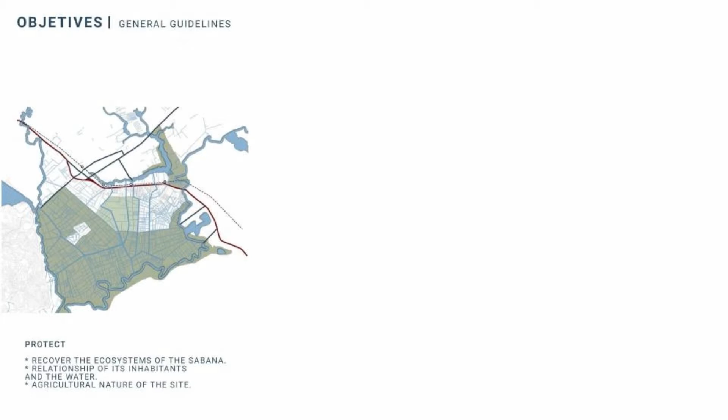With all this in mind, we generated a global plan consisting of 3 main objectives. First, to protect and recover the ecosystems of the savanna, redefining the relationships of the inhabitants with the water and keeping the agricultural nature of the site. Second, to overcome the lack of connectivity in the municipality, providing a network of corridors and connections within the savanna and the rest of the city to enhance mobility.

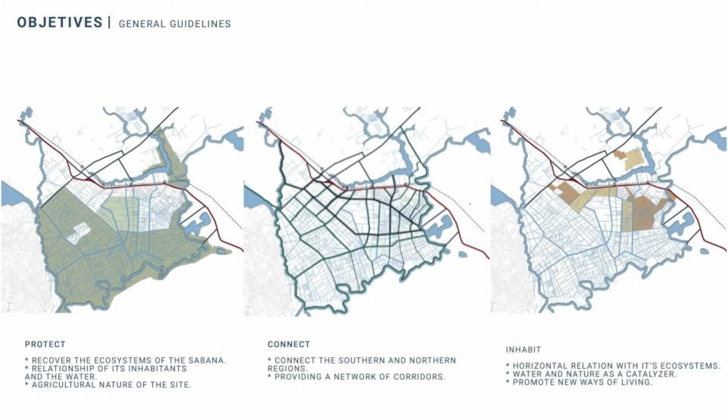And finally, to inhabit the savanna in a more horizontal relation with its ecosystems, using water and public space as a catalyzer to dilute segregation and promote new ways of living. In order to achieve these objectives, the already existing features of the site became pivotal in the development of the territorial strategy. Following the main canals, the plan proposes a network of transversal and parallel corridors to help guide development and enhance connectivity.

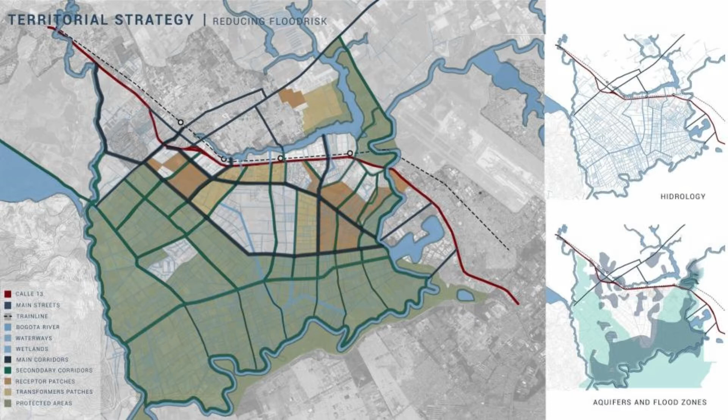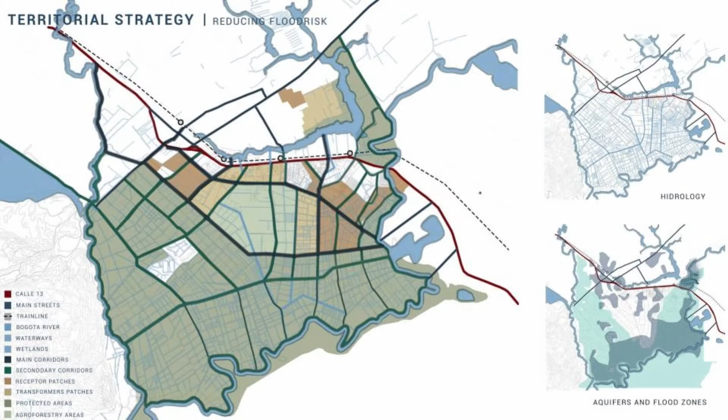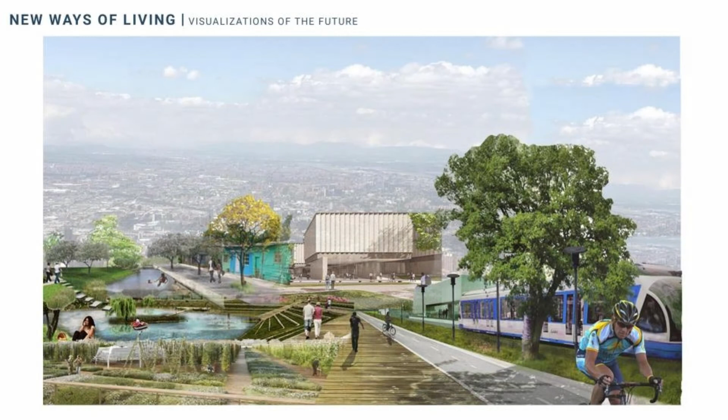With large protected areas that seek to keep urbanization off the floodplains, development is oriented towards the Calle 13 and the parallel corridors. An agroforestry area in the middle aims to articulate the eastern and western developments, while providing room for institutional presence in the area. Having defined a territorial strategy, the visualization through collage helped define the spatial quality of the project. Naturally, the integration of water into public space was a prominent feature of these explorations.

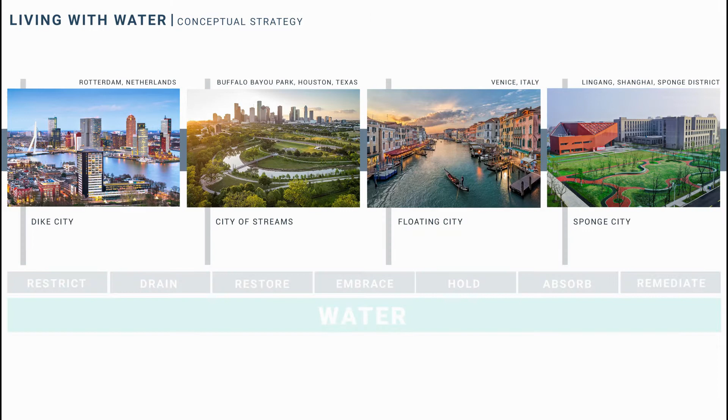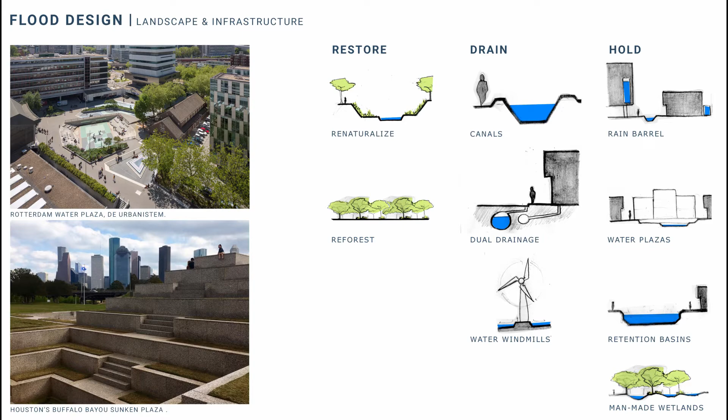Visiting the experience from cities such as Lingang, Rotterdam, and Houston, we were able to conceptualize a comprehensive strategy surrounding water. A holistic approximation to water became fundamental to achieve a more harmonic and resilient way of living in the savanna. Aiming for the spatial qualities of water, each of these strategies breaks down in landscape and architectural techniques. Going beyond traditional notions of infrastructure, this vision aims to create experiences surrounding water, enhancing resilience, sustainability, and recovering the ecosystems of the savanna.

These are reduced to three operations in the urban morphology of the site: to restrict with terraces, to embrace with platforms, and to hold with basins. The combination of these interventions allows for the conceptualization of a new, more resilient urban landscape that is complemented by a robust water infrastructure.

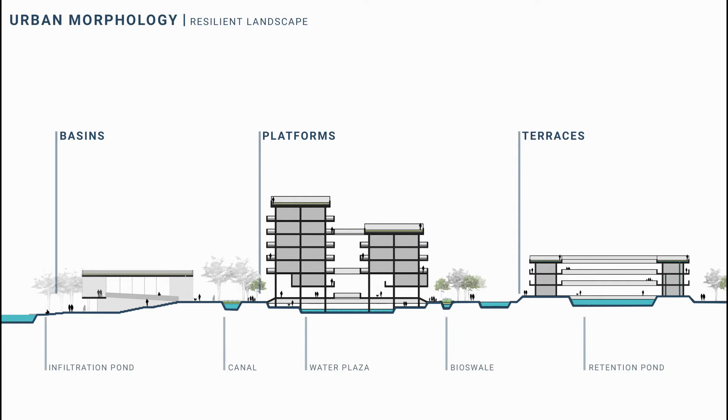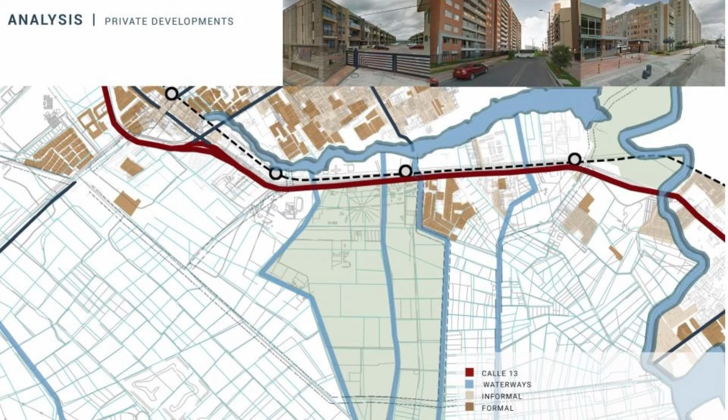Before any intervention, taking a closer look at the morphology of the site was necessary. The self-constructed patches are characterized by their high density and lack of public space. The private developments are usually isolated, with density ranging from high-rise multifamily buildings to country villas.

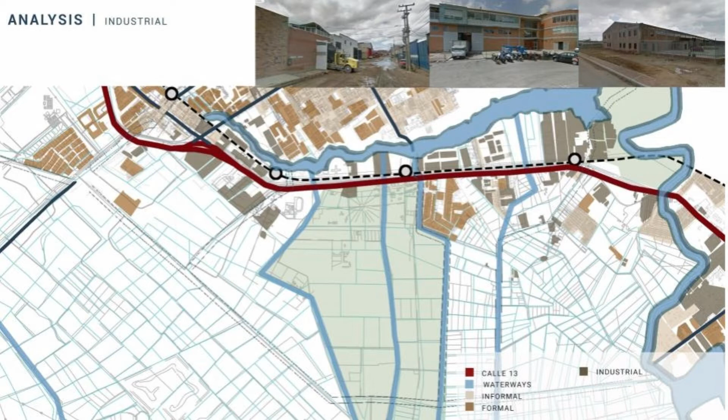The industrial activity concentrates towards the Calle 13 and the Bogotá River, with agricultural facilities also spotted in the heart of La Sabana. These activities are usually linked to junkyards, which are prone to spontaneous development. The lack of urban facilities and institutions is also evident, with very few schools and universities scattered in the territory.

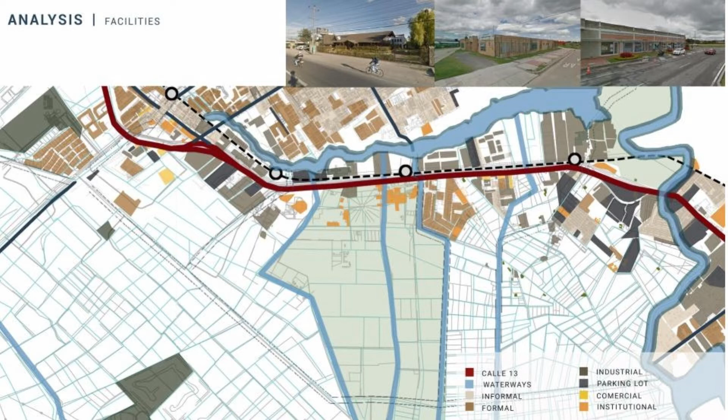Incorporating structure into the territory, the main corridors connect pre-existing features, enhancing the canals and defining the foundations of the mobility system. The different natures of the corridors answer to the conditions of the site and their role within the plan. These corridors incorporate different landscaping milestones and pieces of infrastructure, bringing people closer to the water.

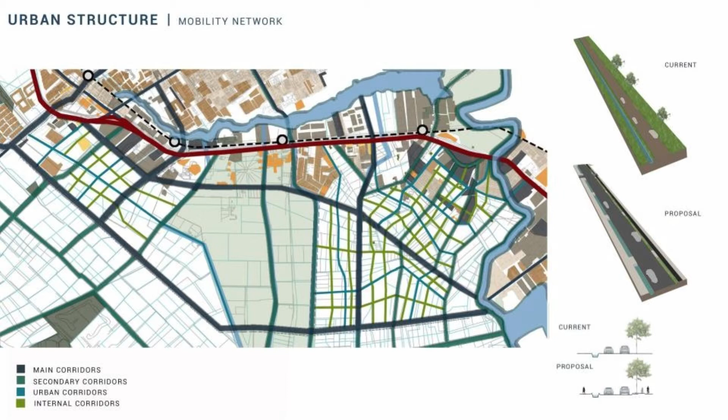The corridors also scale down the territory into urban islands, creating a more flexible urban fabric. A complementary network is proposed within the islands. The mobility system articulates a network of urban spaces and guides development. This public space network is an integral part of the water management system of La Sabana.

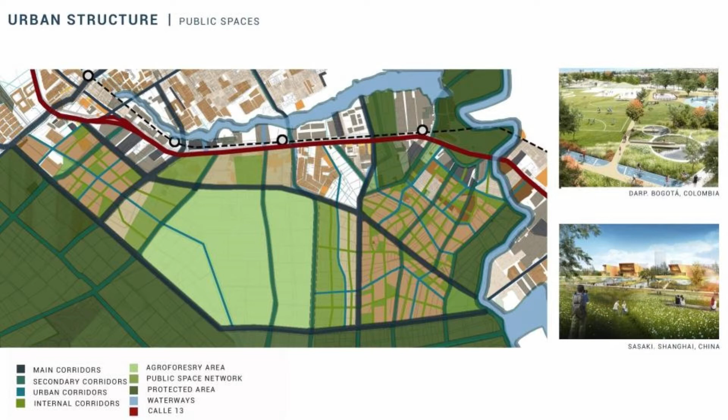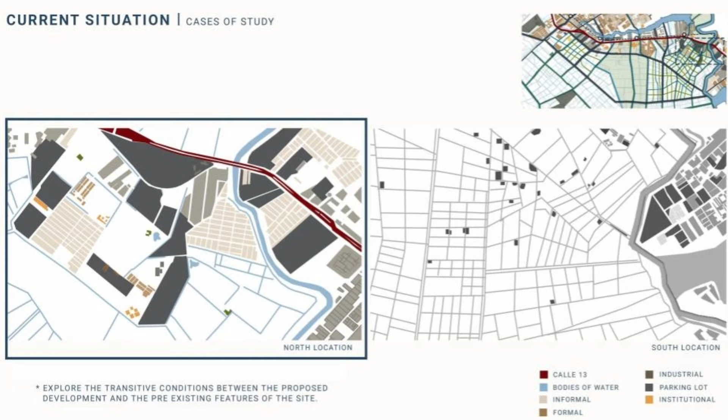To have a better understanding of the urban fabric within this structure, we took a closer look at two different sectors in the plan. The first sector, located toward the north, aims to explore the transitive conditions between the proposed development and the pre-existing features of the site. The second sector explores the borderline conditions of the proposed urban expansion, where the high density of canals and the intense flood risk represents both a challenge and an opportunity.

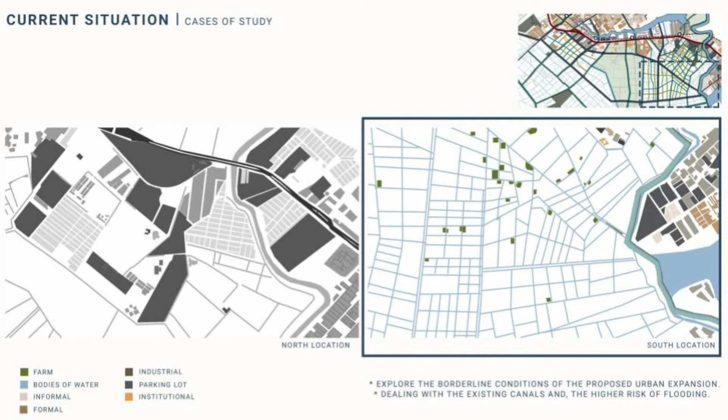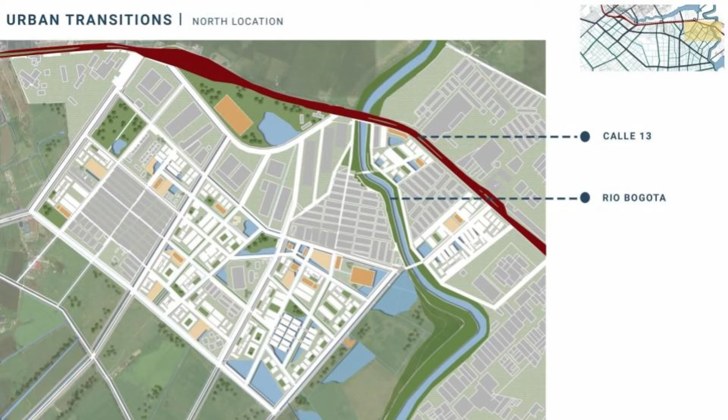In the north, developing alongside the west margin of the Bogotá River represents an important flood risk. The developments, built over terraces, create a physical barrier which conducts runoff water towards the basin in the center of the urban island. The flood prevention system of the site incorporates a combination of open spaces and urban facilities designed to withstand and absorb water.

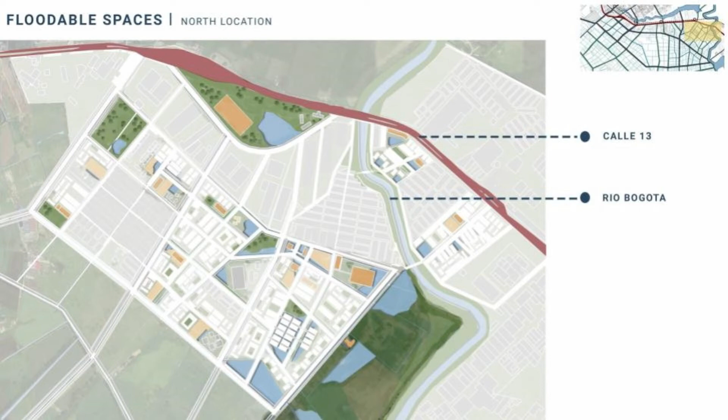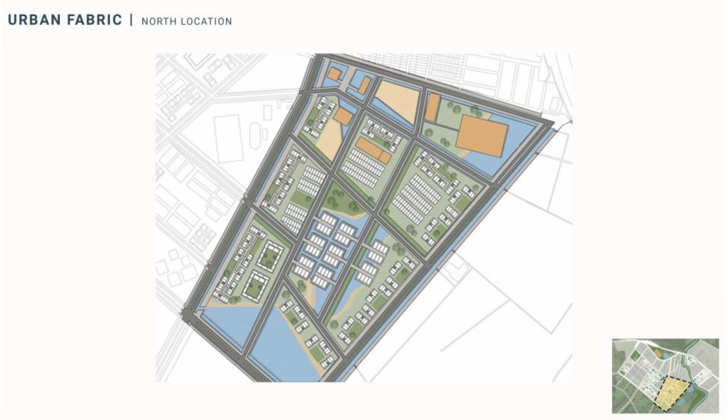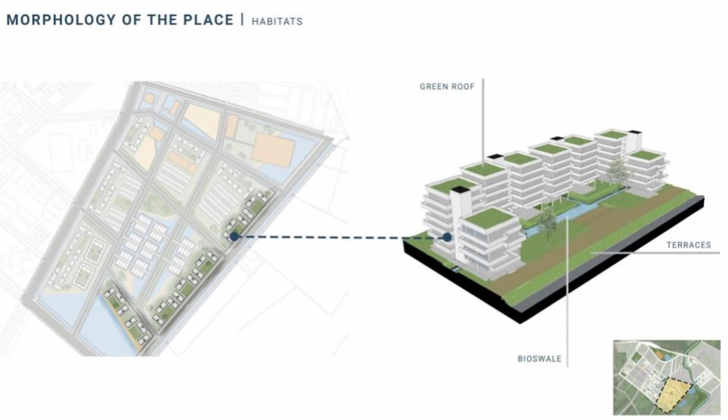This system not only reduces the risk of flooding, but also helps to spatially integrate the pre-existing features of the site with the rest of the proposal. A closer look into the urban islands clarifies the morphology of the place. Low-rise buildings create the protective belt of the site, elevating the ground level against the river.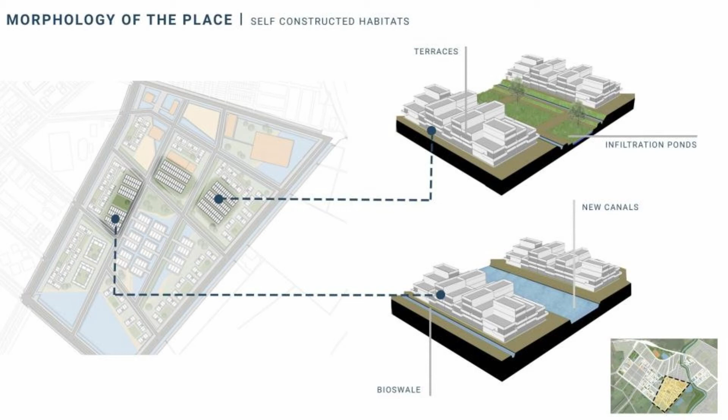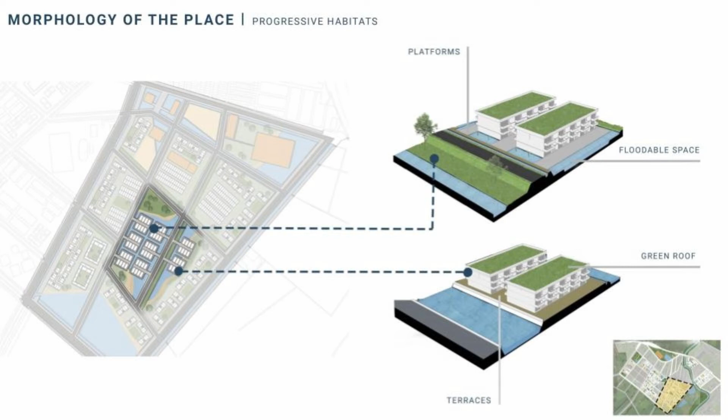The self-constructed habitats take advantage of this protection, developing towards the center of the islands and incorporating water infrastructure and public space. Inhabiting the new basins, the progressive housing solutions allow for different ways to interact with water. This diverse urban fabric is complemented by a set of urban facilities and open spaces that are integral to the water infrastructure of the city.

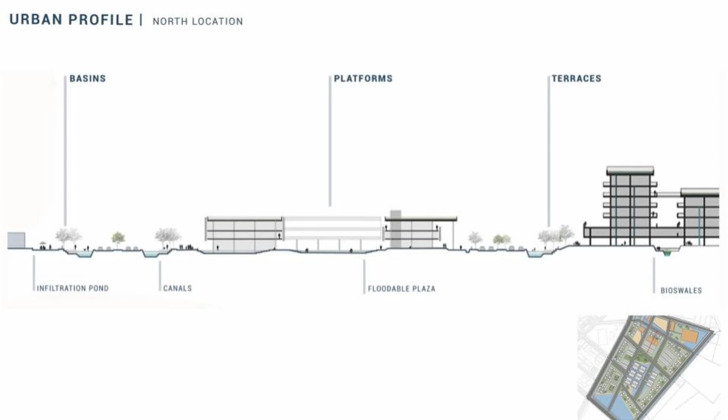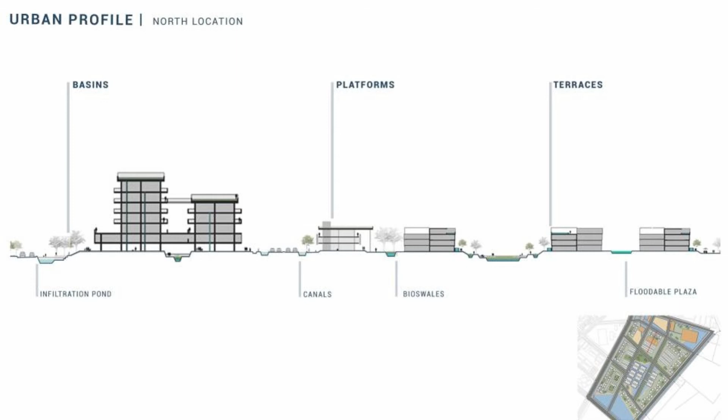This public space system articulates the different stages of development, offering gathering points and invaluable open space for the community to interact and get closer to the water. All these elements come together to create a unique, resilient urban landscape. The interaction between the large-scale territorial interventions and the different pieces of water infrastructure generates new spatial experiences in La Sabana.

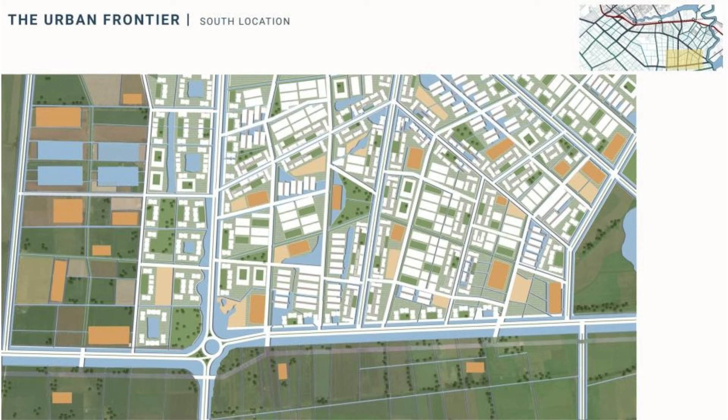The urban frontier takes place closer to the southern margin of the Bogotá River, also dealing with high flood risk. In this site, the strategy is similar, creating a flood buffer towards the borders and a network of basins to distribute runoff water. Despite being the same strategy, the different pre-existing conditions allow for a more atomized system, diluting the risk in a more homogeneous way and bringing water deeper into the urban fabric.

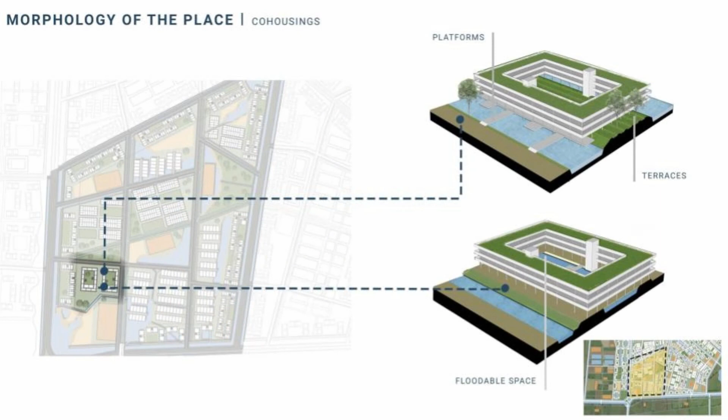In the urban fabric, different ways of approaching water take place. In the cohousings, the cloister-like structures embrace the medium in different ways, involving productivity and water infrastructure into their core. Also, more ground developments take place toward the main corridors, creating horizontal experiences towards the mobility system, enhancing interaction.

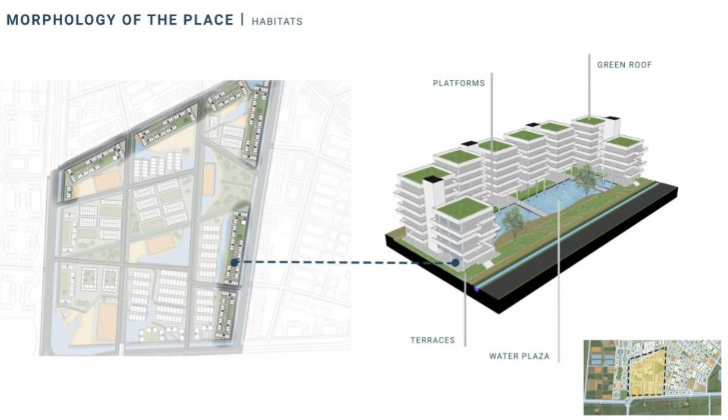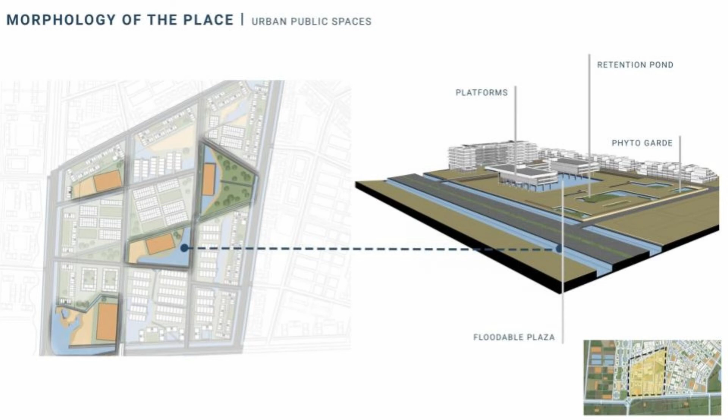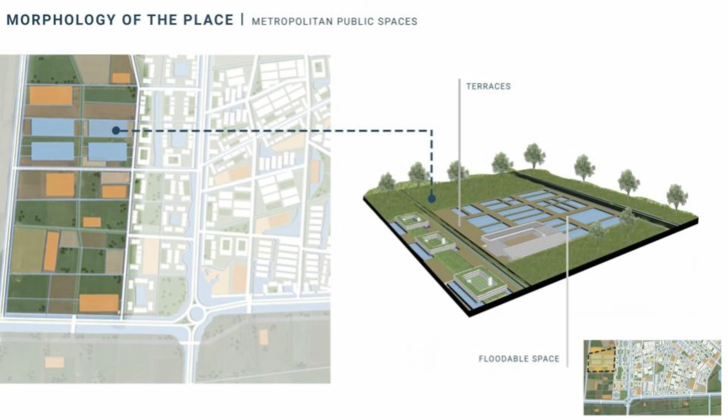Big promoters of community interactions are the public spaces. Deeply integrated to the urban facilities, these pieces of infrastructure offer different ways to get closer to the water. But the urban facilities fill roles beyond interaction and integration, without leaving behind their role in the water management scheme. These can also become important attractors of activity, promoting development and positioning Mosquera as a new centrality.

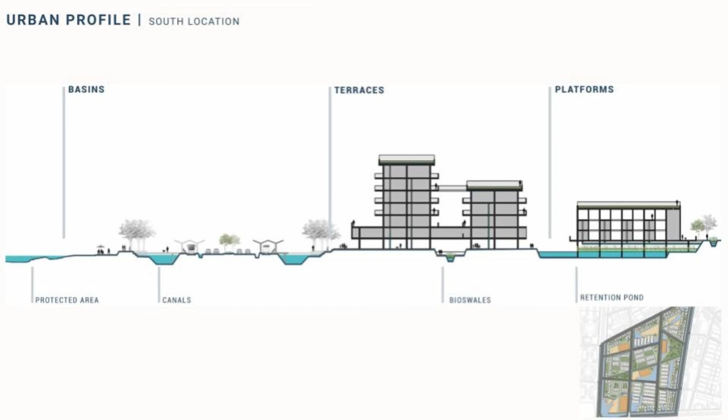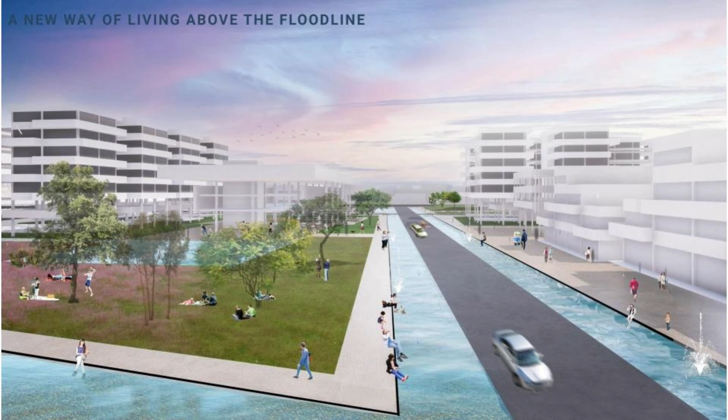Once again, articulating these approaches of life alongside water offers a different perspective of the future developments of La Sabana. Learning to preserve this medium is vital for the emerging communities of Mosquera and the recovery of its ecosystems. The development of these strategies aims to offer a possible way for development and urbanization in such a unique place.

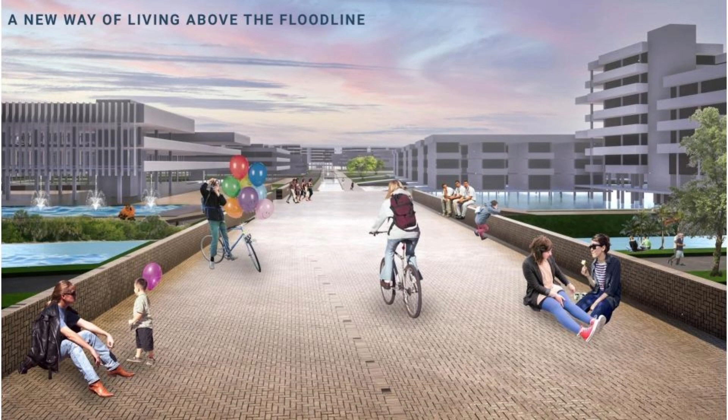Embracing and exalting the features of the site could be key for the future of La Sabana. Providing a setting for healthy and diverse urban development, water can play an important role washing away the walls of segregation and inequality.